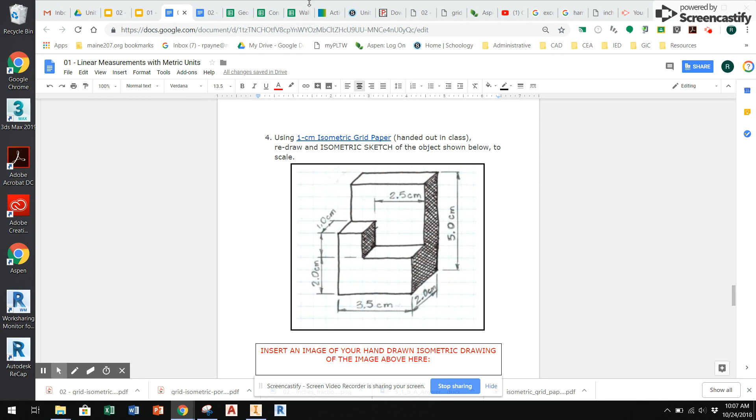So this is our first one here. It's going to be in metric, so you see all the units are currently in centimeters. First thing I'm going to do is push this off to the bottom corner here so I can still see it when I have Inventor open. So here's Inventor, I have it open.

I need to start with creating a new project. So I click on the projects folder, new single user project. I'm going to call this practice files, and then put it on my U drive. Remember, you go to This PC, scroll down to find your U drive, click in your IED folder—mine's IED 2018-19. You see I've already set mine up, but I'm going to just do that again.

So make new folder, practice file. I'll call mine practice file instead of practice files. Then I'll click here, and so now that's where I'm going to be saving all my new stuff. So click OK. And then I can click Finish and Done. You see up here now I have practice files, with a green check mark. So that's the project I'm in.

I'm going to start a new part. But instead of clicking here, which is kind of the generic and goes straight to US customary units, inches and feet—we're working in metric right now, so we're going to create a new part. I'll do that up here with this drop-down menu, new, and that gives me the option to use metric. So if I click metric, I'm going to do a standard millimeter part.

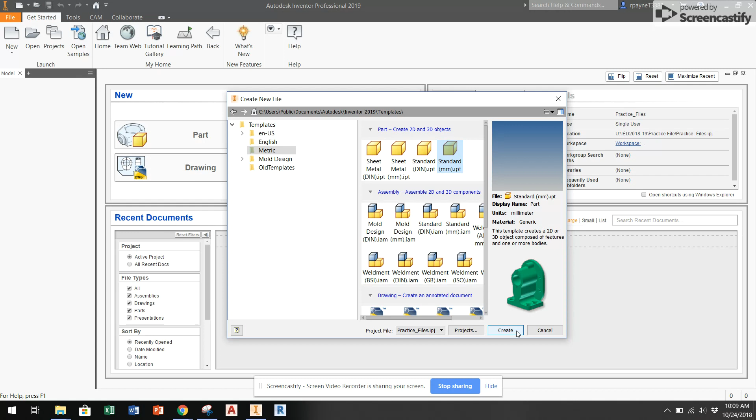And so let's go ahead and start creating our part. So I can see this, I'm going to scroll down a little bit. Now I can see the part that I'm going to make—it's that one right there. And so I'm going to make the back of it first.

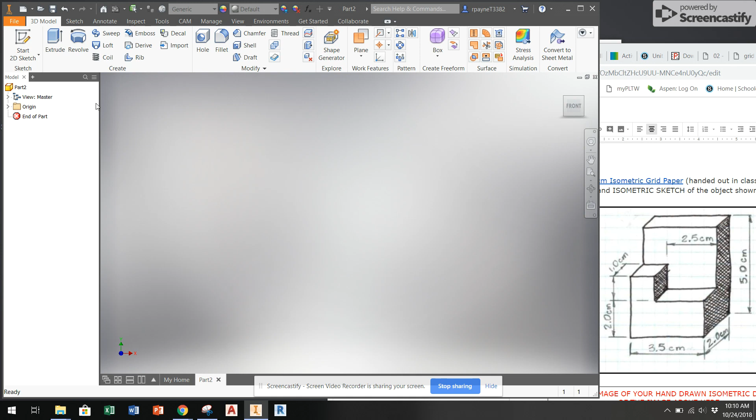You see that the back is just a rectangle that's 3.5 centimeters, which is 35 millimeters wide, by 5 centimeters tall, which is 50 millimeters tall. So I'm going to start a sketch on the XY plane.

Since it's a rectangle, I can click on rectangle, start from the origin, and you see on the coordinates that it's in millimeters. So click on the origin, and the width is 35 millimeters, 3.5 centimeters, and the height is 5 centimeters, which is 50 millimeters. I hit tab each time, and then I hit enter.

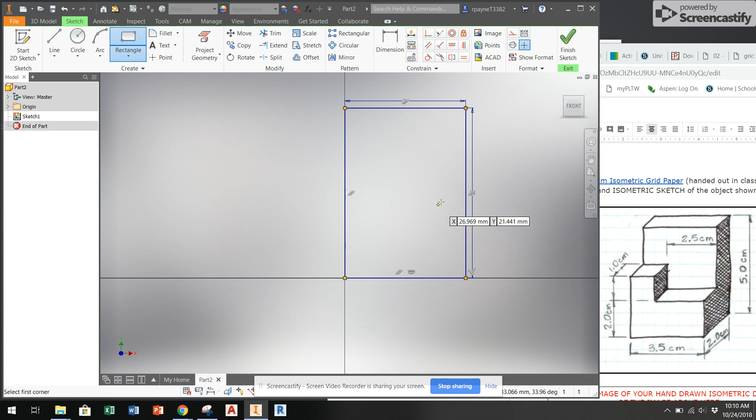I zoom out—there's my rectangle for the back side of this object. I finish my sketch, zoom out a little bit, move it over, then I'll extrude. You see the whole thing is 2 centimeters wide, but this front part is 1 centimeter, so that means the back part must also be 1 centimeter. 1 centimeter is 10 millimeters, that's the default, so I can just click OK.

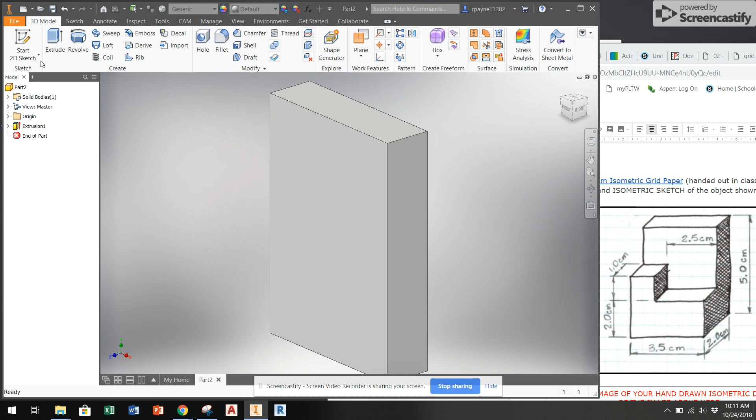So now I've got to make this kind of L shape. This L shape is lying on its side, coming off the front face. So again I start another 2D sketch. I'm going to sketch off the front face, starting in this bottom left corner.

Because it's not a perfect rectangle, it's an L shape, I'm going to do lines. So from this bottom corner, I'm going to go over horizontally—you see 0 degrees—I'm going to go over 35 millimeters, then up 20 millimeters, 2 centimeters.

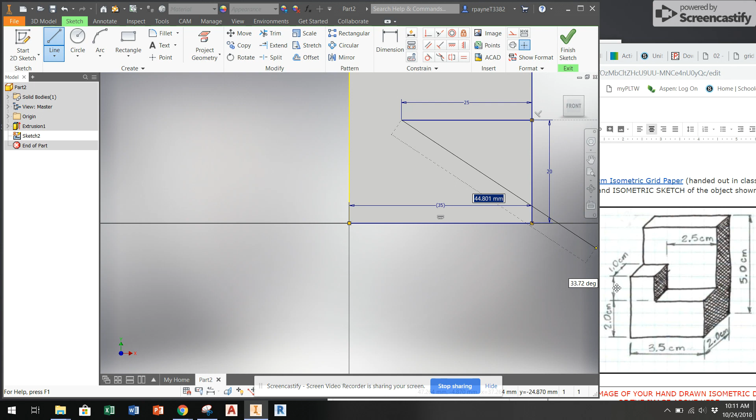I'm going to go over to the left, 2.5 centimeters, which is 25 millimeters. Enter, then go up. It doesn't really specify, but I can see that this dimension and this dimension is 1 centimeter by 1 centimeter cubed, which is 10 millimeters. I'm going up 10 millimeters, so up 90 degrees, 10, enter. Scroll out a little so I can see it, then over to the left, 10 millimeters again, enter.

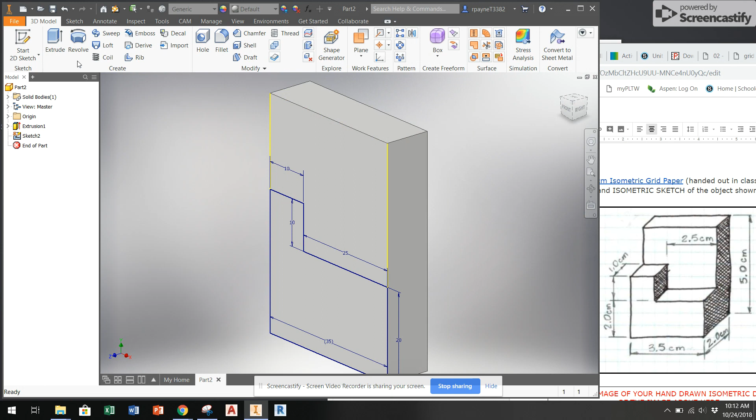I'm going to close it off by using my mouse to click on the green button. I'm finished with my sketch, and then I can extrude again. Again, it's a 1 centimeter or 10 millimeter extrusion. Click OK, and I'm done with my part.

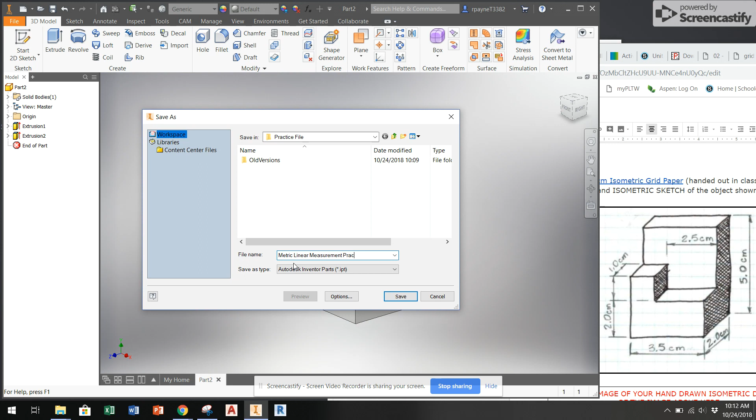All right, so let's go ahead and save the part. Let's call it metric linear measurement practice. Kind of a long name, but metric linear measurement practice. Click Save, and go back to my home screen.

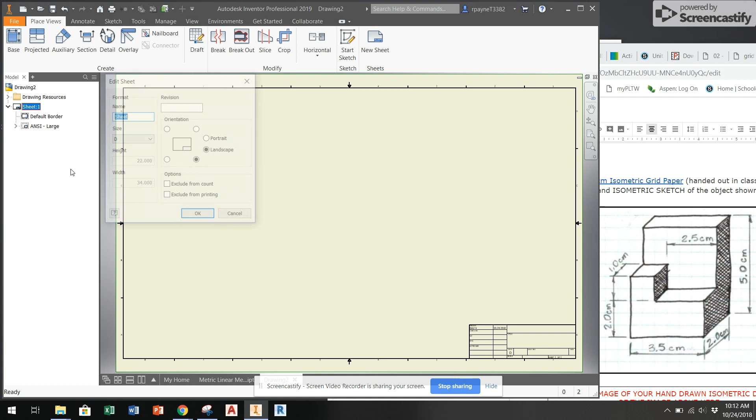I need a new drawing. Mostly we're going to draw on an A-size sheet of paper. So I right-click on the sheet, edit sheet. I'm going to call it A-size. Okay, let's put our part in here.

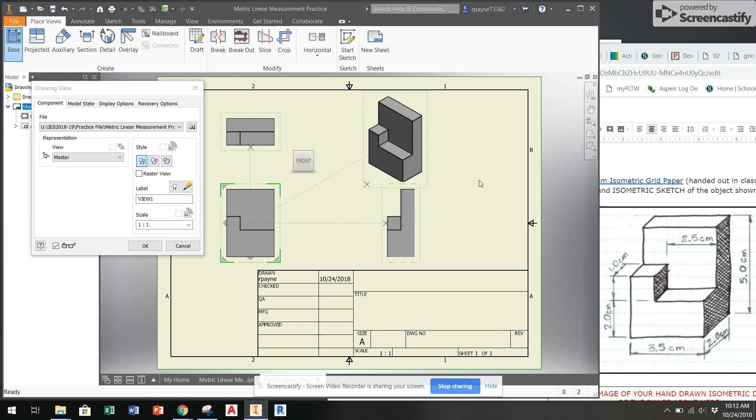So base, it just goes to the last thing I just drew. That's the front face, drag it over to the left. That's my front face. There's my top. Click, there's my right side. And here's my isometric. All right, my scale is 1:1.

Everything's good. Click OK. I want my isometric to always be shaded, so I hover over it until I see the right box. Right click, edit view, shaded view. Click OK. Now let's go ahead and put some dimensions in.

So I go to my annotate tab, click on dimension. I want to dimension this side, but it shows 1.38. I know it's 3.5. That's because dimensions automatically default to inches. So I need to change this.

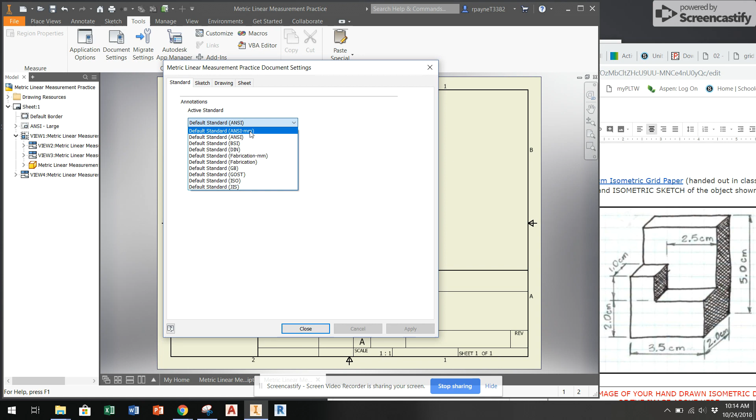Escape, go to my Tools menu, Document Settings, and you see how it's default standard ANSI. That's the American National Standards Institute, I believe. We need to change that to ANSI millimeters. So click on ANSI-MM, click Apply, click Close. Now if I go back to my Annotate tab, click on Dimension, then I see it's in 35 millimeters.

All right, excellent. So let's go ahead and I'll show you an easier way to do some of our measurements. If you click on Baseline - so for baseline, if this is my base, I'm going to do all the height measurements here. So that's the base.

Then I'm going to dimension to here. I'm also going to dimension to here and to here, all three of those. Then I right click and say continue. I can make all three measurements at the exact same time. Click to place it, right click to say create. There we go. Much faster way to create our measurements.

All right, so I'm going to do that again for the top view. I'm going to use this as my baseline. Then I want to measure to here and here. Say continue. Click to place it, right click, say create.

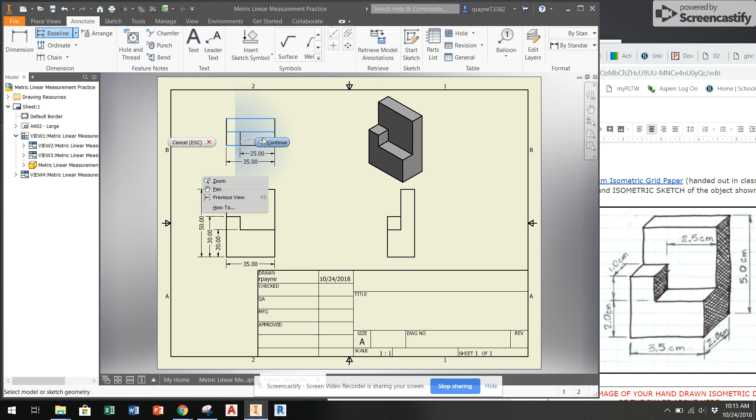All right, and then I'm going to do one more, the thickness. Here's my base to here and then to here. Right click, continue, go over to the right, click to place, right click, create. Since I've got all my thicknesses on my top view, I don't need to put any thicknesses here. I've got all my heights on my front view. Again, I don't need any heights here. So there we go, we are done with that.

And now we just need to update the title here. And so in order to do that, we click down on drawing resources, right click on title blocks, click down on title blocks, right click on ANSI A, click - oops, not insert, click edit, nope.

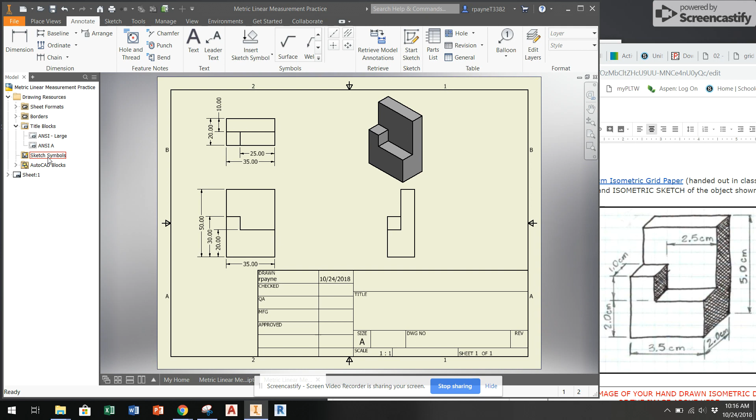We will come back with another one to remind us how to update our title block.